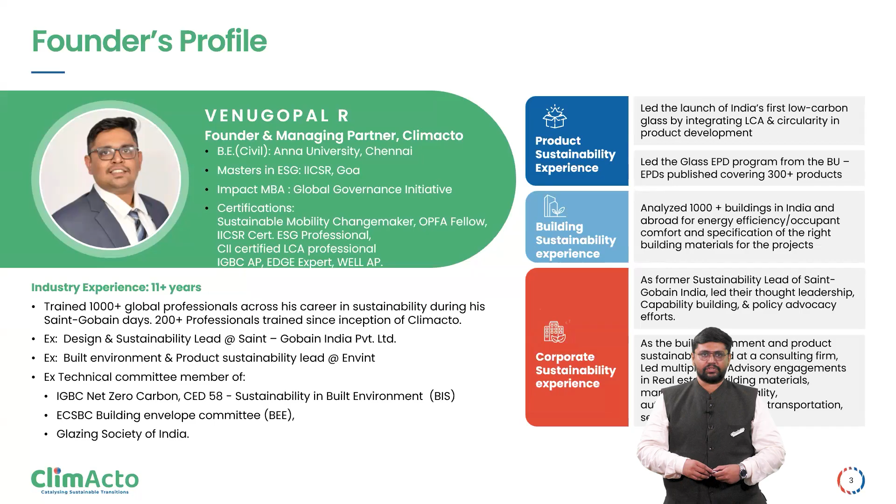We are 7 months young, and before that I was a sustainability lead at Saint-Gobain, right? So that's a bit about me. More than 11 years of experience in sustainability, and I've worked across product building and corporate sustainability. I've also done some policy work at BIS and BEE through industry bodies like CII and Glazing Society of India, etc. And I was responsible for launching India's first low carbon glass, which has 54% lesser global warming potential than any other glass products, during my time at Saint-Gobain, of course.

Cool. So, today's plan, we already started with a quick introduction. I will try to cover the life cycle assessment from a building's perspective. I'll just brush up on the basics in that case, because many of you were not willing to raise your hands. So I'll quickly brush up on the basics of embodied carbon of a building. And I'll also cover some of the trends that we observe in the industry when it comes to life cycle assessment intersecting with embodied carbon and ESG, right? So that's something we will do, and then we can have a quick short discussion on any queries. So this is going to be the flow.

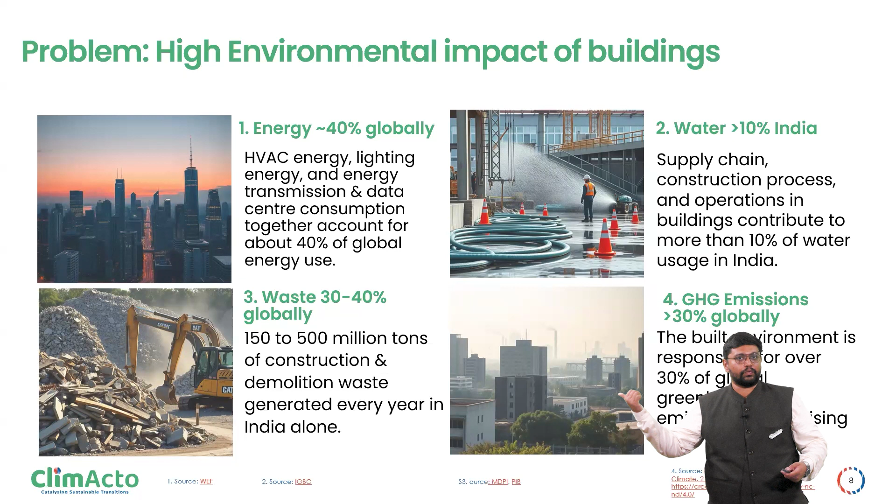The range is between 0.5 kg to a kg of waste per capita, right, per household. That's how much waste we generate every day. And that accounts for almost 30 to 40% of the global waste that is being generated. And of course, the fourth point is the GHG emissions from this one industry is 30 to 40%. Right? So this is the impact that this one particular sector is creating.

So then what do we do? Do we not build at all? No more development? Is that the line of thought? Should the answer be degrowth? That's debatable. We can't take very strong positions on this, but what we need to do is balance, right? We need to grow and at the same time find a way to grow responsibly. That's what we need to start thinking about.

And as a developing country, we have a vision for ourselves. By 2047, we need to become a developed country, a Viksit Bharat. So to become a developed country, we can't stop making roads and stop making buildings. But what we can do is make them responsible and make them more sustainable.

So the green building movement in India for the last 2.5 decades has been very active, and I've been in that movement for almost 1.5 decades. And what we see is sustainable construction is possible, and it is a possible solution for the problem we have in hand. So the storyline till now is buildings are part of the problem, but I can show you how they can also be part of the solution, right?

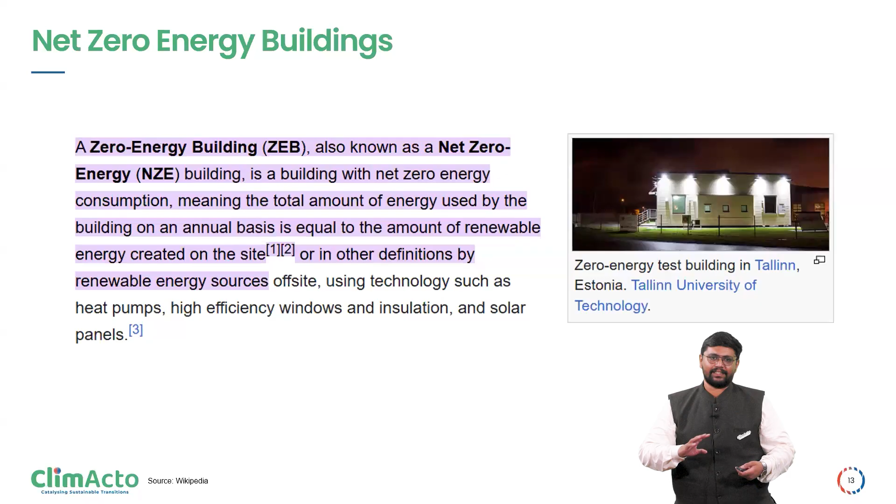So it's still not zero. For the remaining 20 kilowatt hours, you shift towards greener power, right? And then you do the math, it comes close to zero. If someone claims that their building is an absolute zero building, then you'll have to raise your eyebrows. It might not be true. All that you could do is achieve net zero, where you do the math and it comes close to zero, right?

So even in a net zero building, there are going to be some residual emissions. There is a carbon footprint in spite of it being a net zero energy building. And that is mostly the carbon emission that goes unaccounted, which is the embodied carbon emission. So now I introduce this new jargon to all of you. Embodied carbon is nothing but the carbon footprint that goes into making the building: the cement, the steel, the aluminum. All these raw materials get manufactured. Most of these materials are hard to abate, right?

So cement, when you manufacture 1 kg of cement, can anyone tell me what is the carbon footprint? Yes, 0.8, and that can range from 0.8 to 1 kg, depending on the type of raw materials used, and it can be brought down to as low as 0.4, 0.5 if you add some other materials instead of limestone. So cement is that. Steel, any guess how much is the carbon footprint of 1 kg of steel? 2.5 kgs. If you have to get 1 kg of steel, you are going to emit 2.5 kgs.

That's the Indian average. In steel you have primary steel and secondary steel. Primary steel is from the ore: you do mining, then you melt it at a higher temperature, add other processes, and that's the primary steel. There's secondary steel, which is made mostly out of scrap. That secondary steel can go as low as 0.6 kgs per kg. There are Indian manufacturers who make steel of the same functional properties at 0.6 kg and also at 2.5 kgs, right?

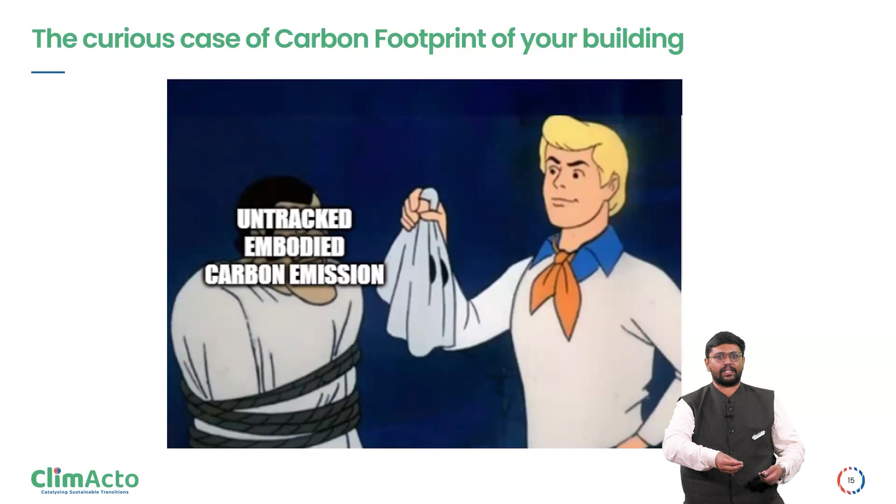So like that, for each process there is an emission, and the process emissions of your products and raw materials that go into the building are your embodied carbon. And it also has multiple other aspects. Even after your building is demolished, the processing of that waste will also be accounted in the embodied carbon. So basically, to simplify this, thinking about the life cycle of the building will give you these 4 broad stages.

First is the product stage. You have the cement, steel, aluminum, glass, bricks, all of these materials manufactured at different locations. Then you have the construction stage. All these materials come to the site, and construction of the building happens, starting from the foundation till the superstructure, etc. Then the use stage.

The life of the building can range anywhere between 30 to 60 years, depending on the design codes. And then the end of life of the building. After its serviceable years, either it is left abandoned or it is demolished and a new building is constructed. Okay, so these are the four stages of the building.

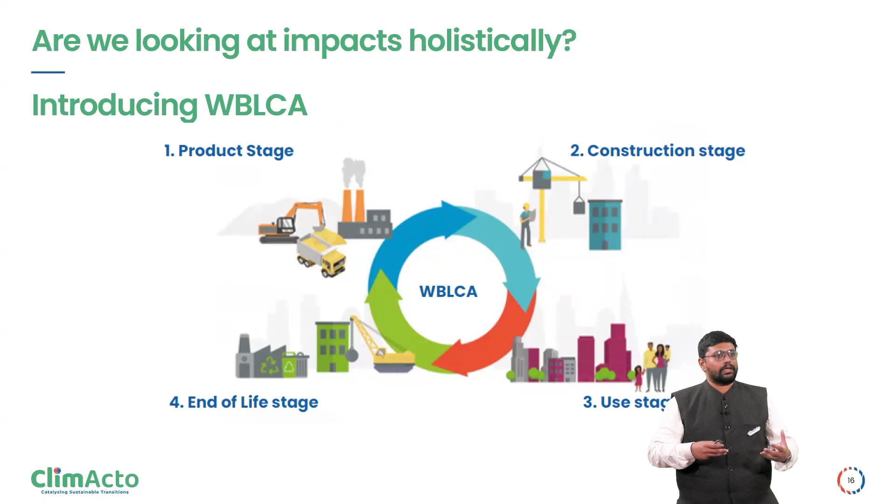So the second new jargon I am introducing is WBLCA, whole building life cycle assessment. Whole building life cycle assessment is you consider the entire life cycle of a building, and you understand its emissions right from the raw material till the end of life, and sometimes beyond end of life of the building, which includes your reuse and also repair, etc.

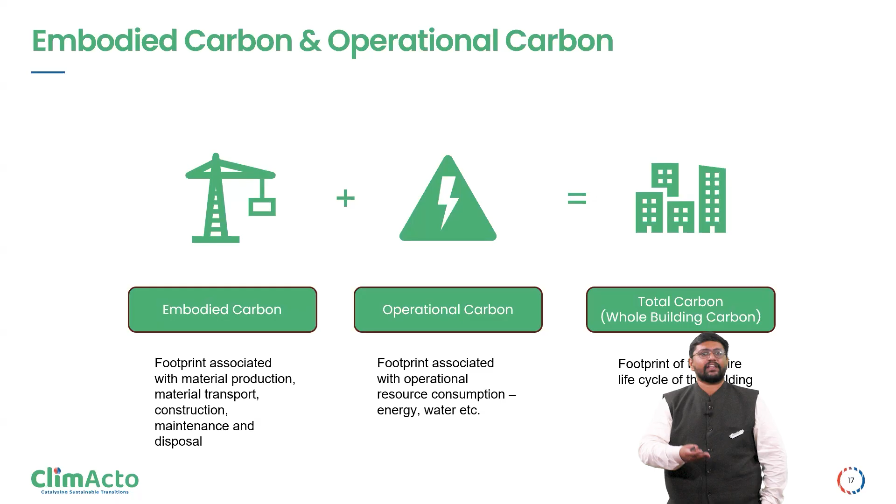Okay, so broadly we could try to simplify that circular diagram into this. There's embodied carbon and then there's operational carbon, which put together gives the whole building carbon, right? And as you all might already know, there are multiple impact categories. Global warming potential is only one of them. Today for buildings, we are talking only the global warming potential, which is the carbon footprint. But ideally, we should look at multiple impact categories like acid rain potential, ozone depletion potential. But today's focus is going to be on embodied carbon and operational carbon, which is the GWP, right?

Any guesses why this shift is happening? Why is 76-24 becoming 51-49? The material usage. Yes, the material usage is going to increase, yes. But why did 76 become 51? The type of material. Maybe we will be adding renewable energy. Renewable energy, energy efficiency, passive and active strategies to reduce the energy.

So the technology, once you build the building, you can upgrade the HVAC, you can shift the energy to cleaner sources, etc. But you cannot change what cement was used, what steel was used. It's going to be there till the life of the building. So if we don't take decisions at the drawing board today, the buildings of 2050, 2060 are going to stack up like that, right? So that's why the awareness creation needs to happen today.

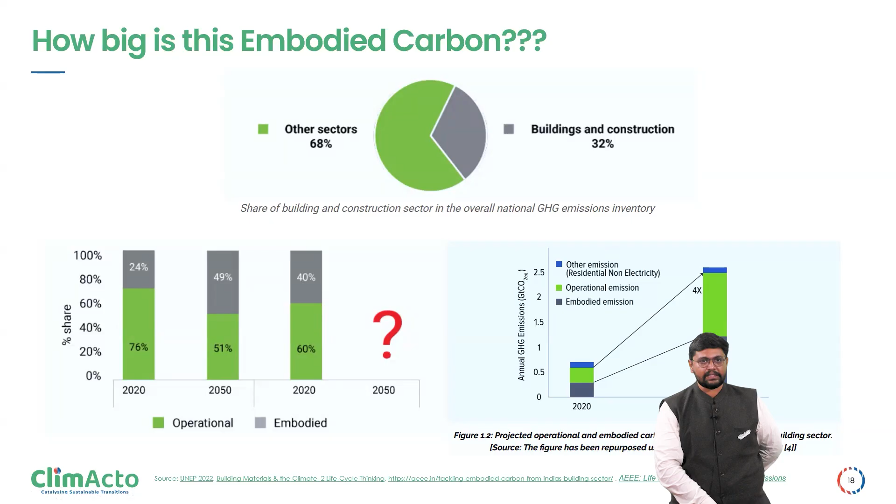So this estimate says 60-40 is the number in India. This study was done by AEEE and they are saying 60-40 is the number today in India and we have no clue how much it is going to be in 2050. And the estimates are saying it's going to be 4x. So in 2020, whatever number was there, it's going to become 4x by 2070, and that's when we plan to be net zero as a country. So this is the problem we have in hand.

Let's look at how do we manage this. To manage anything, we need to start measuring it. What gets measured gets managed is a very famous management quote and I'm applying it here for embodied carbon as well. And what are the existing frameworks? In India, we don't have our own framework for doing this, but there are global standards and guidelines available.

15978, the European nations have this standard which says how to report the carbon footprint of a building across its life cycle. So like how you have a standard for concrete, for steel, for manufacturing, this is only for calculating and reporting the life cycle impact of a building. And if you look at it from a product lens, it's 15804, the environmental product declaration. The environmental product declaration in simple words is a mark sheet of your product from an impact point of view.

So usually for us, we need to get more marks to be a good student, but in this case it should get less marks to be a good product. So lesser the impact, better the product, right?

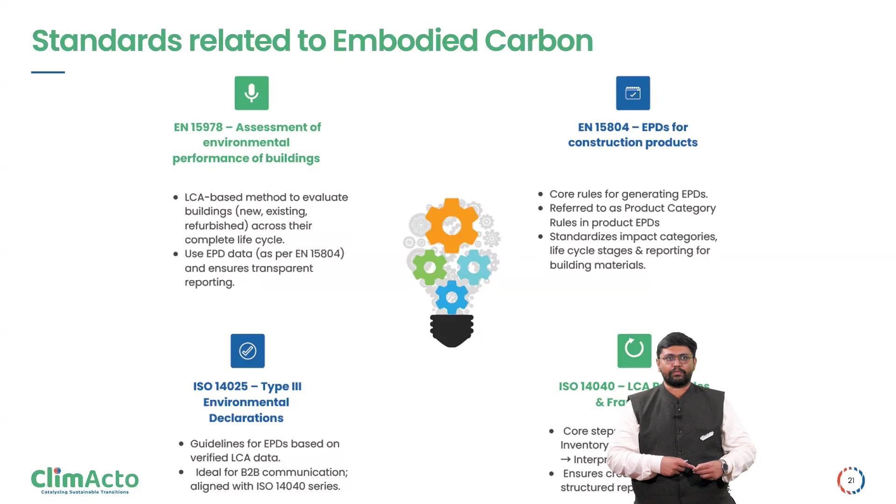So the environmental product declaration, we have 15804. Then we have the EPD standard, which is 14025, and they give you the standard way to report an EPD and publish an EPD. And 14040 is the LCA principles. So we already have these frameworks in place which can guide us with the measurement.

Okay, and I'm bringing you some new nomenclature as per 15978, which calls the product stage as A1 to A3. So this is basically whatever you have as the life cycle stages. They have given some standard ways of labeling them so that you have an apple to apple comparison between two buildings, right? So if I say that building A has 500 kgs per square meter carbon footprint, building B has only 250 kgs per square meter carbon footprint, the first question you should ask is what is the boundary?

Are you only talking about the product stage, or are you talking about the entire life cycle, right? So these are some questions that you need to ask. So to reduce all those conversations, they have standardized all these formats.

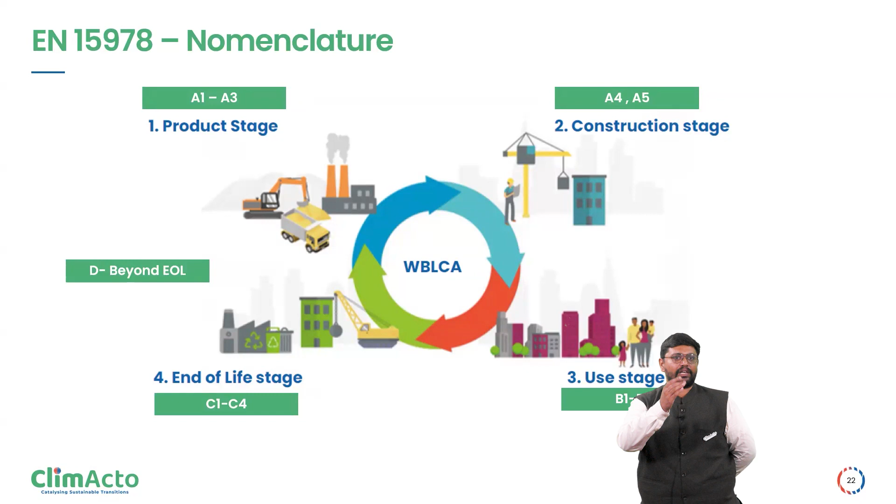So A1 to A3 is product stage, A4 and A5 is construction stage, B1 to B7 is use stage, end of life stage is C1 to C4, and beyond end of life, EOL is end of life, beyond end of life is D. So A, B, C, D: product and construction are in A, use is in B, end of life is in C, and beyond end of life is in D. So this is the standard nomenclature that they follow.

And just to put it up in one slide, this is how it looks. So A1 is nothing but the raw material supply. Let's take for example cement. The cement raw materials include your limestone, and that's the basic raw material that you need, right? So where is the limestone coming from? That's the first question. The energy spent in mining that, the energy spent in processing that, all that will be in A1. A2 is transporting the raw material to the manufacturer site, right?

So if you are transporting that limestone from say Tada to Chennai, that has a 120 kilometer commute, right? So if you are commuting through diesel, if you are bringing it through EVs or petrol or CNG, all that will affect your A2. A3 is your manufacturing. So you are manufacturing cement. For that you will expend energy. So that will be accounted in A3.

So A1 to A3 is your cradle to gate. So these are the standard boundary conditions defined in 14040. The cradle to gate emissions is A1 to A3, which is nothing but the cement manufactured, the carbon footprint which we discussed, 0.8 kgs, 1 kgs, all that is cradle to gate, right? Then A4 is you get cement, you transport that manufactured good to the site, right? So that is A4, and A5 is construction related emission.

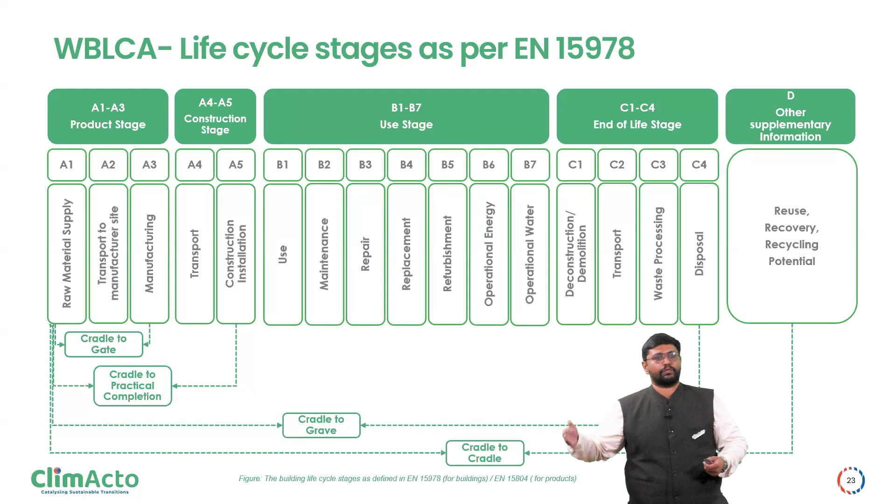And anything beyond this that is not captured here will go into D, right? So this is broadly the life cycle of a building labeled as per 15978. You open any environmental product declaration of steel, glass, any building material, it will follow this, because the product category rule for an EPD for building material is usually following 15804. 15804 is an EN standard which was developed based upon 15978. Right? So the names and the labeling will be very similar. So everything in the built environment will speak the same language, right?

So clearly, if you are focusing on the product stage and during the construction stage, we have access to almost 60% of the embodied carbon. You have control over 60% of embodied carbon across its life. The remaining 38 to 40%, there's only so much that can be done. For instance, I'll take the example of paint, right? Paint is something that will be repainted after a few years because it will lose its properties, right? It won't look as good. The paint done today might not look as good after 5 or 6 years. So in that case, what happens? We do a repainting. We will account that in the use phase.

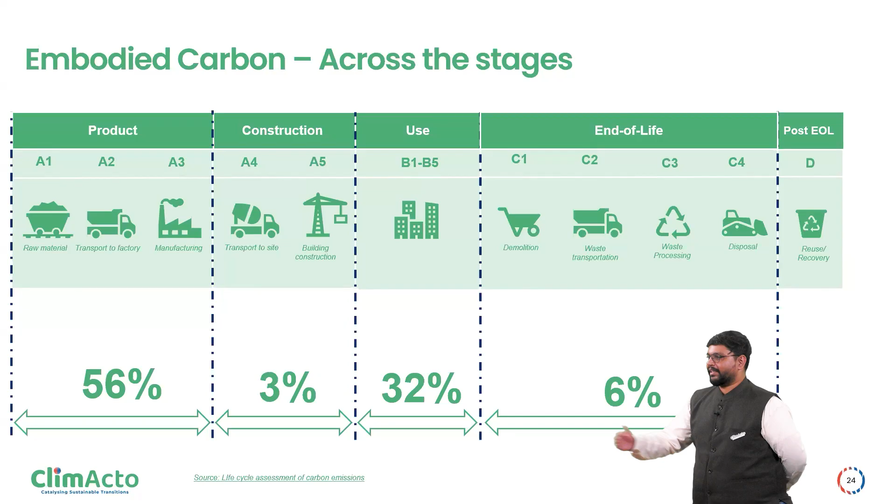You can't use it directly because in India everybody speaks A1 to A3. Beyond the gate nobody has control of what happens to that product. So that is the scenario. Even in many global products you will see this. Only A1 to A3 data will be available. Very rarely you will find cradle to grave data. Okay, fine.

So some quick math. There are two things that you need to understand. As I already explained, the material quantity is important. What is the material quantity used in the building, and what is the GWP per that material quantity. In both the cases there are challenges of data. First, material quantity: something will be there in the bill of quantities, something will be there in the site. So that is one challenge. Second, the GWP: mostly the numbers available are European numbers. Indian product manufacturers having their own EPDs and LCAs done are fewer. So these are the two challenges in this slide.

So that is a material footprint, right? That is quite easy and straightforward to calculate. 100 kgs of cement, 1 kg of carbon per kg of cement. So 100 into 1 is 100 kg of carbon footprint for that one line item. Do the same exercise for steel, aluminium, glass, concrete. You will find the carbon footprint for the entire BOQ. That is A1 to A3.

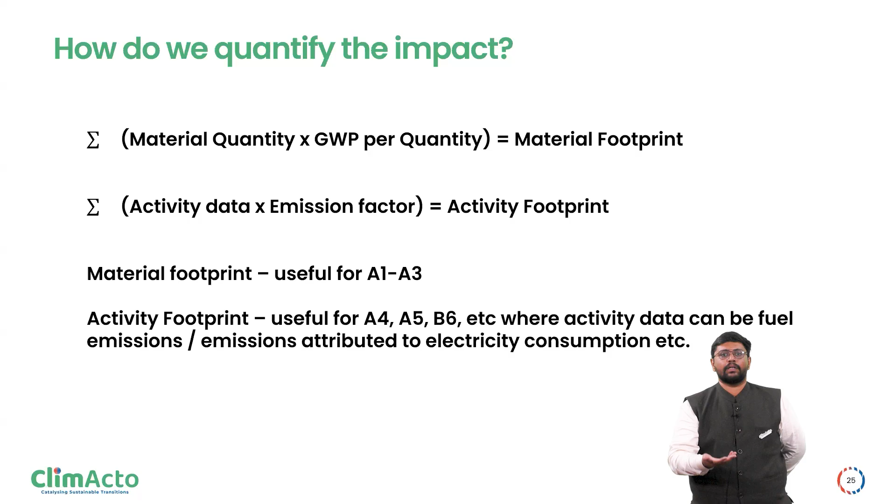Activities like A4, transporting product from the manufacturing site to your project site, will need activity data. How many kilometers traveled, what is the type of vehicle used, what is the type of fuel used, all that will be required for calculating numbers like A4, A5, B6, etc., which are activity data, right?

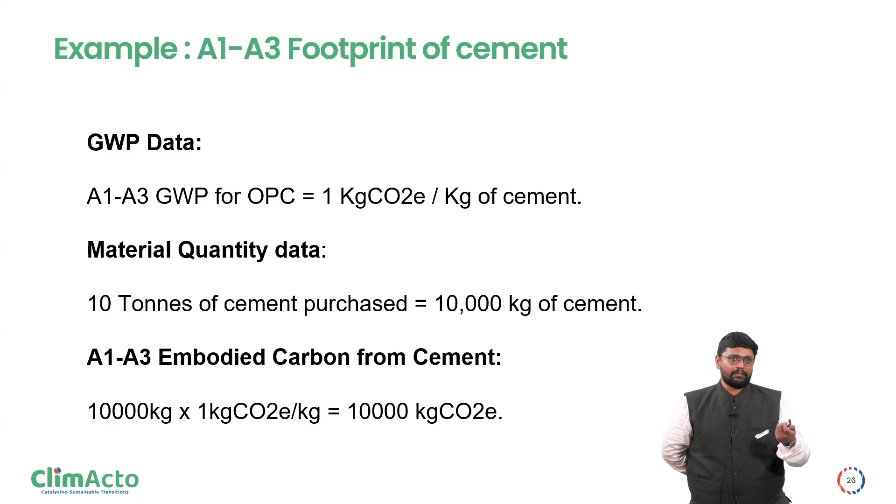So just giving some example, A1 to A3: I am taking 1 kg for OPC, ordinary Portland cement. 10 tons of cement used, which means 10,000 kgs of cement, into 1 kg carbon dioxide equivalent per kg of cement is 10,000 kg CO2. This is for this one line item.

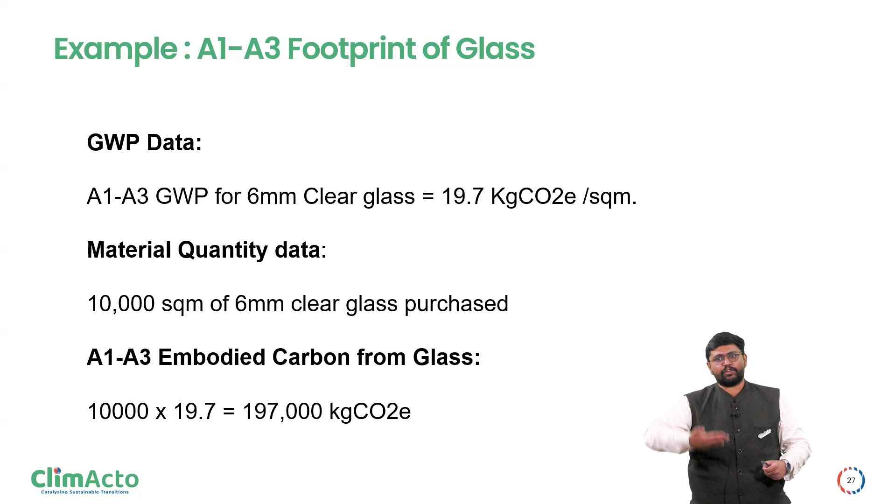Same for clear glass, a regular clear glass 6 mm. You can notice that when it comes to glass, the thickness aspect also comes in: 6 mm glass, 8 mm glass, 10 mm glass, and then how much area, is it 10,000 square meter, 8,000 square meter. That's where the aspect of functional unit is very important. When you read the environmental product declaration, you need to note down what is the functional unit. It can be kg, ton, square meter. If it is a paint, it can be square meter painted, right? So all these are some examples. It's a very straightforward calculation.

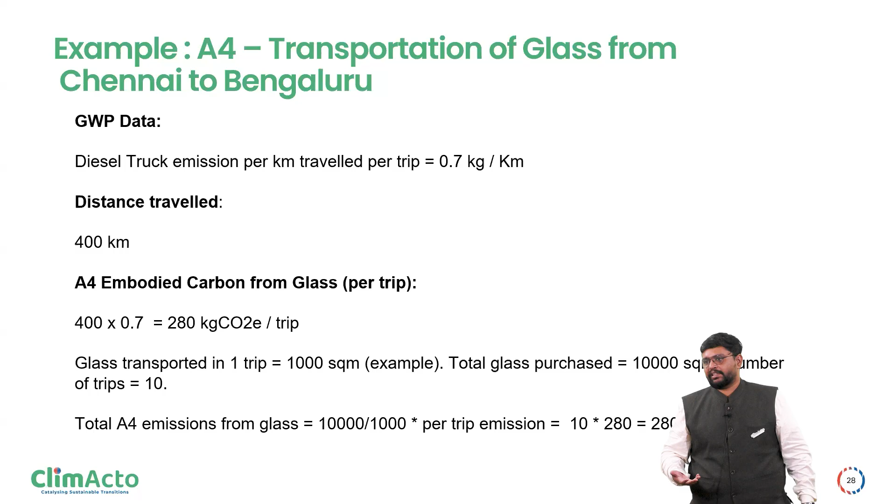Distance traveled can also have an impact, and also the capacity of the vehicle, right? If the capacity of vehicle is only 20 tons and your requirement is say 100 tons, then you need 5 trucks. A higher capacity vehicle might emit slightly more than the regular vehicle, but maybe the number of trips will be lesser. So you need to calculate the number of trips, quantity. It's a very straightforward calculation. The challenge is data availability, right?

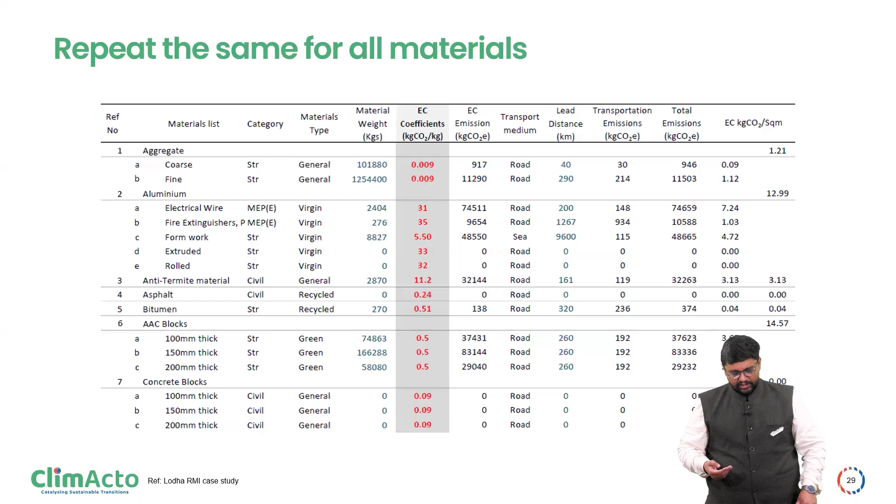Then you can notice the next column, the transport medium, whether it is road or by sea, etc., as mentioned over there. And then the distance traveled by that material. And then for each type of travel mode of transport, you need to have a representative embodied carbon for that. For that, you will need to either refer to some sources which include the International Maritime Organization, the IMOs have their own databases, right? Or if it is going to be by flight, there are some CORSIA databases available.

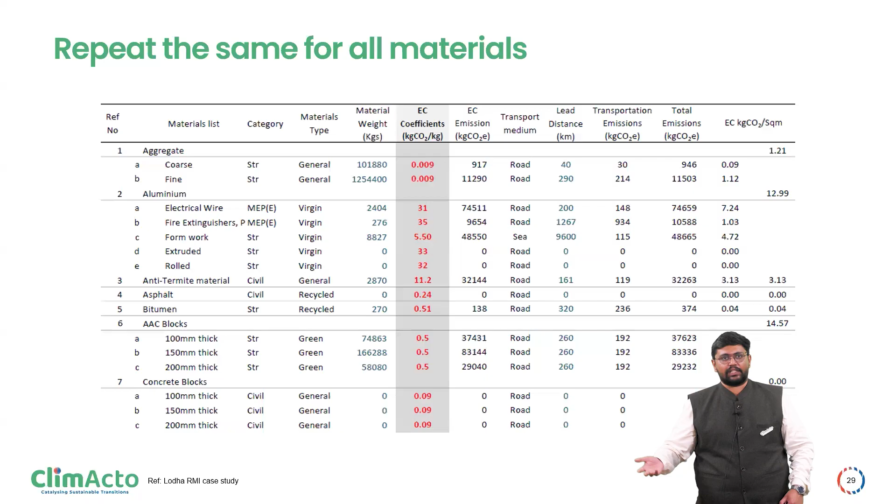Mostly the IPCC database will also give you these numbers for the transportation, but if you need more data, you can find other databases and mention them in your calculations, right? So the transportation related detail is like how you do a GHG accounting. It's very similar, but the material level data you need to get it from EPDs.

Okay, but where can I find this carbon footprint of these building materials? I think I slightly gave away that answer. It's from the environmental product declarations; that's the most reliable source of information. In the absence of that, you get some industry reports. Like for instance, for cement, there is something called the GCCA, right? So the GCCA is the Global Cement and Concrete Association. They release industry reports where you could get these numbers.

Like OPC is 1 kg, PSC, which is Portland slag cement, that is so much kgs, and slag cement is so much kgs. So all those details you can get from industry reports as well. There are research papers available. There are institutes like RMI who also release some papers, methodologies, etc. Right? There's something called the CLF, the Carbon Leadership Forum. So Carbon Leadership Forum is another source for a lot of case studies on embodied carbon.

Okay, this is how a typical EPD will look like. I'm going to show you the anatomy of an EPD. If you open an EPD, you will have the brand name, the product name, then all these details about the product in the first page. You will also find the validity and the geographical scope. It's very site specific, because the same glass or cement made in India, if it is going to be made in another geographical location like Europe or UK, it might have different energy coefficients, different sources of energy, distance of transportation. EPDs are always site specific.

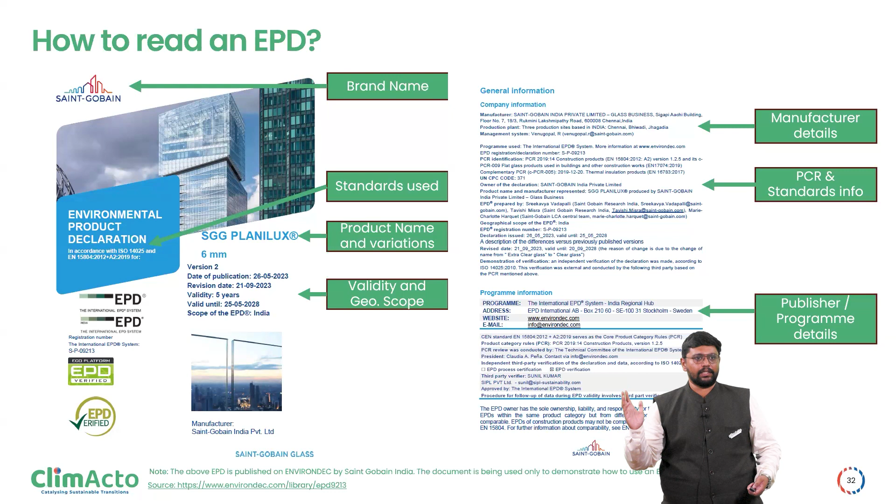So all these EPDs will be hosted in one publisher's website, like Environdec, EPD Hub, EPD Norge, etc. So these guys host EPDs and publish EPDs on their website. These are openly available. You can go and download them. Okay, then you will find the functional unit. In this case, it's 1 square meter of glazing. Then you will find the system boundaries like A1 to A3, cradle to gate, etc.

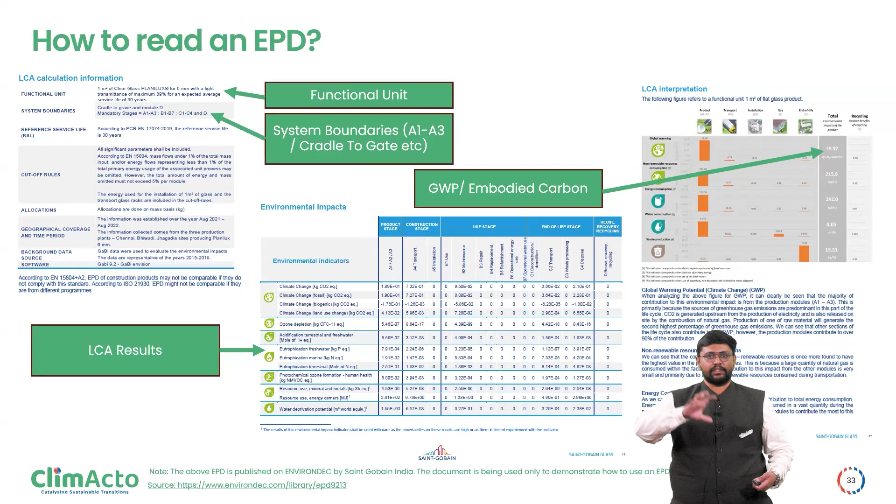Then you will have the LCA results for that functional unit, for the mentioned system boundary. So the GWP or embodied carbon, you will find it as how many kgs either in the climate change section or in the GWP section.

So some questions that you can ask, because every stage matters. In the product stage, how can I reduce the material consumption is a great question. Are there alternative technologies which can reduce consumption of concrete, mainly cement and steel? If we can adopt that, yes, that can reduce the embodied carbon. Second, if you could not optimize the material consumption, because I'm just playing with that equation, material quantity multiplied by the embodied carbon is the total emission of that particular line item.

So the first lever I am pulling is the material consumption. The second lever I can pull is the product. Does it have a lower carbon footprint? Is there an alternative with a lower carbon footprint? So that is the second lever I can pull. And always when you buy products along with your BOQs, this is something I want to bring in.

If you are asking for a product, ask its footprint, right? It's going to take time, but we need to start moving towards the direction. Then the construction stage, can we procure locally available materials, because A4 is getting reduced, right? Then can we opt for lower emission transportation? If the distance cannot be reduced, can we shift the fuel from diesel to CNG, right? So that is the question. That's another lever to pull.

Then can we use efficient and eco-friendly construction techniques? When I say eco-friendly, can the construction happen in a way that it consumes less energy, less water, less fuel, etc. So all that is the A4 and A5 emission. Then comes the B1 to B7.

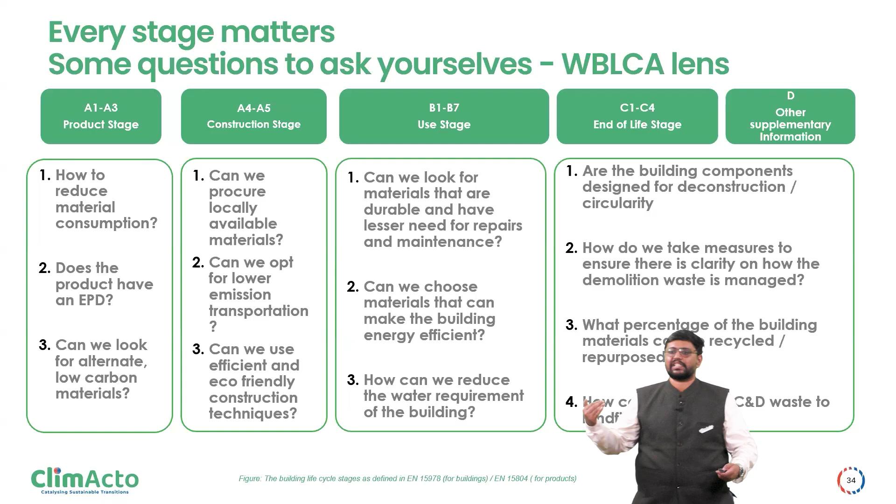How do we take measures to ensure that there is clarity on how the demolition waste is managed? This is a big topic. There are a lot of regulations that are coming around this. What percentage of the building materials can be recycled or repurposed? How can we reduce the C&D? So these are broadly some questions people can ask at the early stage, right? If we find the answer for these questions, I'm sure that embodied carbon reduction is also possible. So this is something I wanted to discuss.

Okay. Quickly, let me take you through some trends that I observe. LCA is finally getting its way into green building certifications. For a long time, the green building movement in India was talking more about energy efficiency, water efficiency, because they were the problems that we were having. Now you can see LCA getting its place in green building certifications like IGBC, GRIHA, LEED v5. LEED has a recent one, LEED v5.

LCA also has its place in ESG frameworks like BRSR. BRSR is the Indian ESG framework called Business Responsibility and Sustainability Reporting. This is mandated for the top 1,000 listed companies in India, right? So when they disclose their financial information, these listed companies also disclose their ESG performance as a report, and in that some criteria are linked to LCA.

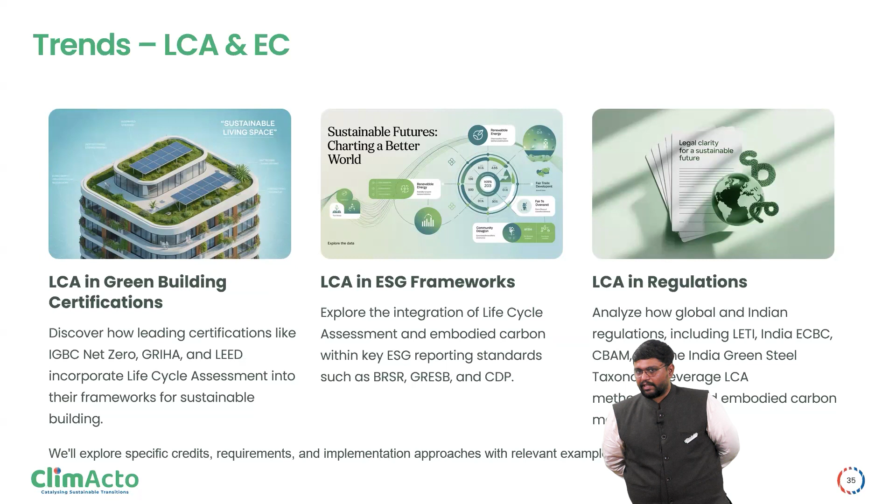Then LCA is getting into regulations. This I've seen in the UK, I've also seen in Europe. I will share some examples, but there are going to be some regulations around life cycle assessment. So let's quickly see. One of them is the ECSBC. How many of you know what ECSBC is? I'll go back.

Okay, one of you. It was earlier ECBC. Yes, perfect. So it was the Energy Conservation Building Code, which was an Indian guideline from 2007 till 2024. It was a guideline, and 2024 onwards we have it as the ECSBC. And as per the revised Energy Conservation Act in India, buildings beyond a certain threshold should follow this. It's no more a guideline, right?

So it's been getting mandated in phases, and in that you can find a chapter on sustainable materials which speaks the language that we just spoke, right? So EN 15978 is referred. kgCO2 equivalent per square meter needs to be reported, right? So that's one of the things that is there in ECSBC.

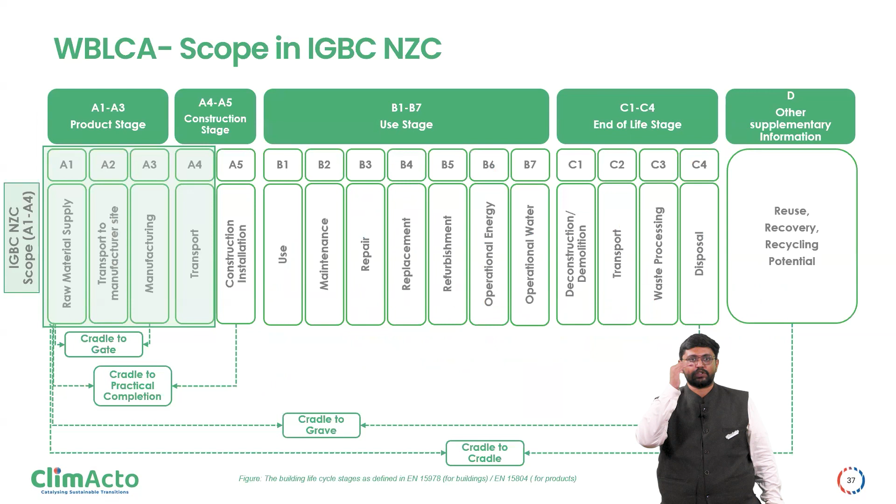Slowly there will also be some thresholds that will be released, right? So first it starts with measurement, and slowly you will also see some thresholds saying it needs to be limited to say 500 kg, 600 kg per square meter. Things will be rolling out soon on all these topics.

Okay, and then in green building rating systems, there's this IGBC's pilot rating system on net zero carbon buildings. IGBC has some 32 different rating systems; 4 of them are net zero ratings: net zero energy, net zero water, net zero waste. The fourth one is net zero carbon. I was there in the technical committee while formulating this.

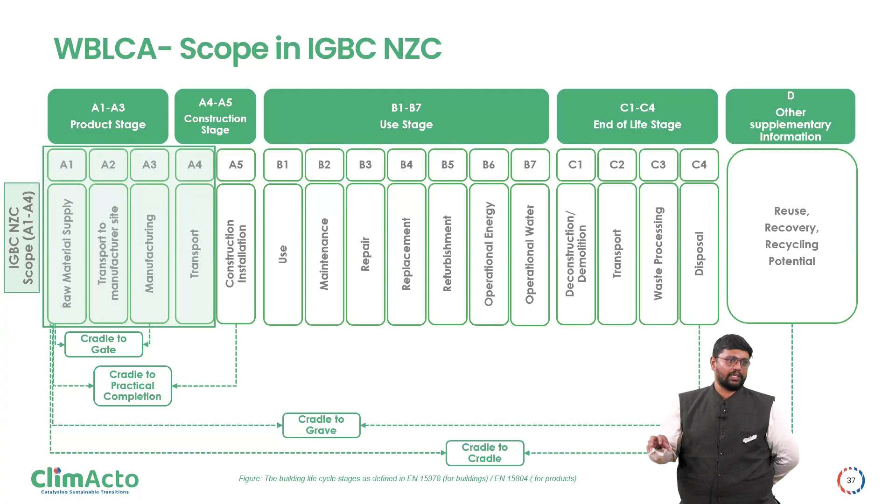They have set a threshold of 700 kg per square meter of built area, which is including A1 to A4, so which is the product and the transportation. So you need to buy a good product and buy it locally to make the carbon footprint lesser. It has to go below 700 kg per square meter, and based on how much percentage you reduce, you get points, right? So that's how this rating was designed, and A1 to A4 is a boundary condition for IGBC net zero carbon rating.

So this is just some screenshot from the rating system. It's still in pilot mode, and they have two levels: net zero carbon and near net zero carbon. If you score 40 points, you get near net zero carbon. If you get 60 points, you get net zero carbon. And they have criteria on how to achieve each of this.

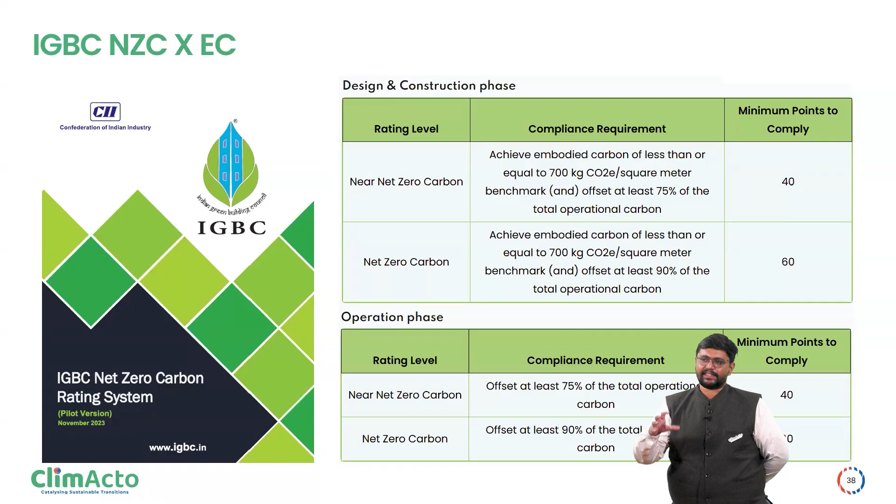And also in the new construction rating system itself, there are some revisions coming in. I have seen the draft. All I can comment is embodied carbon is also getting its place in it. It was launched in the Green Building Congress recently. Everyone will have to start measuring and declaring it, right? And that is given as a credit. So if you go through the new rating system, you'll understand that this has got its place as well, right? I don't want to comment further because I'm not sure if the final one is published or not. I was there in the committee, so yeah.

Coming to this, this is from LEED V5, the recent one. LEED is from USGBC. So I'm using all 4-letter abbreviations. These are all different rating systems. IGBC is the Indian Green Building Council. ECSBC is the Energy Conservation and Sustainability Building Code from the Bureau of Energy Efficiency in India. Then for whole building life cycle assessment, there is a credit and there is a prerequisite in LEED. LEED is from the US Green Building Council, because I also noticed that there are international delegates here.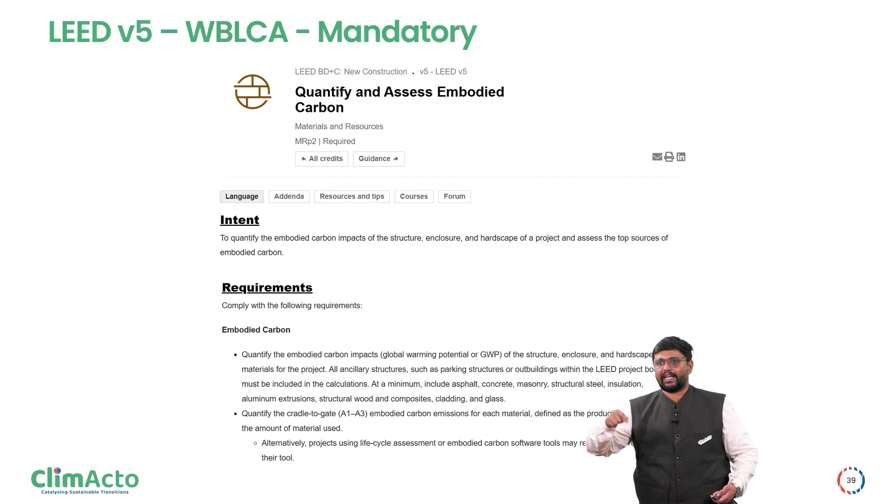So LEED is a global rating system, and there even A1 to A3 is mandated. You can't get a platinum rated building by using bad materials, right? So you need to calculate the carbon footprint from A1 to A3, and for credits you need to do other impact categories as well. There are some 6 impact categories defined in the credit, and if you reduce 20% compared to the baseline, you get some additional points. So that's how the credits are restructured now in the building material section of green buildings.

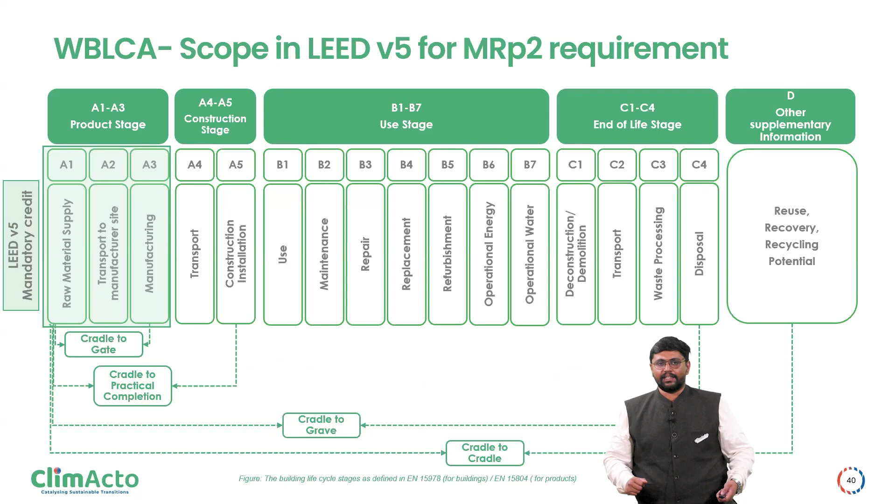So I'm just showing you what's happening in all these areas. I'm not telling you that this is exactly what you need to do to reduce it, because this is an ever evolving topic, right? So you can see here, the mandatory requirement is MRP2. You can find it, A1 to A3 is the coverage. So now you can go and see in different rating systems, if they are saying A1 to A3, it means cradle to gate, just for your understanding, right? So this is the thing I said.

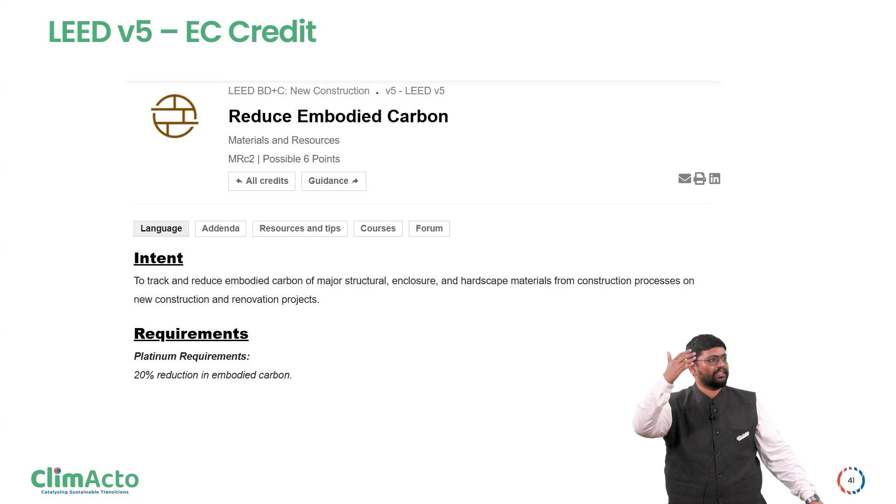If you reduce it by 20%, if you observe the last line: LEED platinum is the highest rating in that system. If you want to achieve LEED platinum, you should show that you have reduced at least 20% of the carbon footprint impact compared to a regular building, right? Without that, you can't get it.

Okay, GRIHA is another Indian rating system. The latest one is GRIHA V6. I'm still showing you GRIHA v2019 because I'm not sure if V6 is finally out there or not. But in V19, there were 3 criteria.

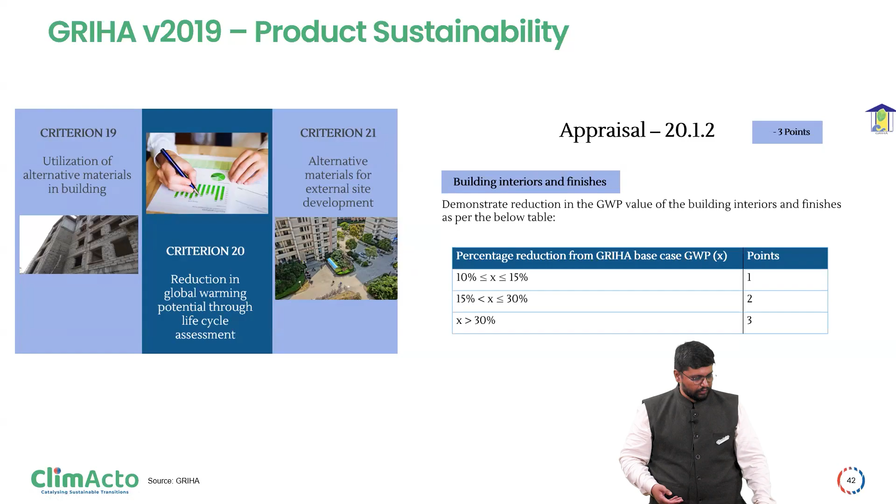I checked the V6 document, these 3 criteria are still there. What they are saying is how you will use sustainable materials, sustainable building materials to reduce the embodied carbon. How they are incentivizing us: if you have a 10 to 15% reduction, you get 1 point. If you get a 15 to 30% reduction, you get 2 points. If you reduce more than 30%, you get 3 points.

So all this is defined in the Griha rating system. You will also find it in the V6 rating that was recently launched. I think it was a month back. Yeah, so this is the scope in Griha. You notice that in IGBC it was A1 to A4, which included the transportation. In LEED it was A1 to A3 for the mandatory requirement. And then in Griha it is A1 to A4 plus B4.

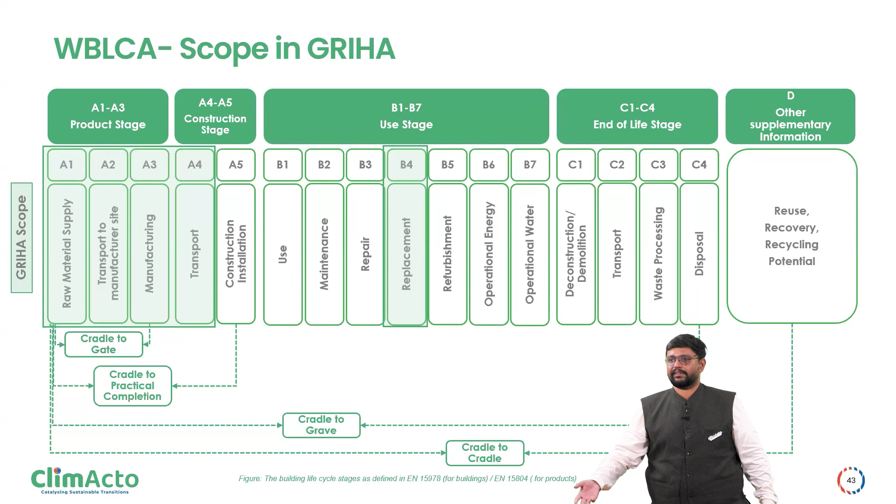Reason is, the paint example I took. If you are going to replace it, then you are going to account for it, right? So this is giving credit for a durable material. If the material is durable, then the replacement emission will not come in its lifetime, right? So that is something that is different in Griha.

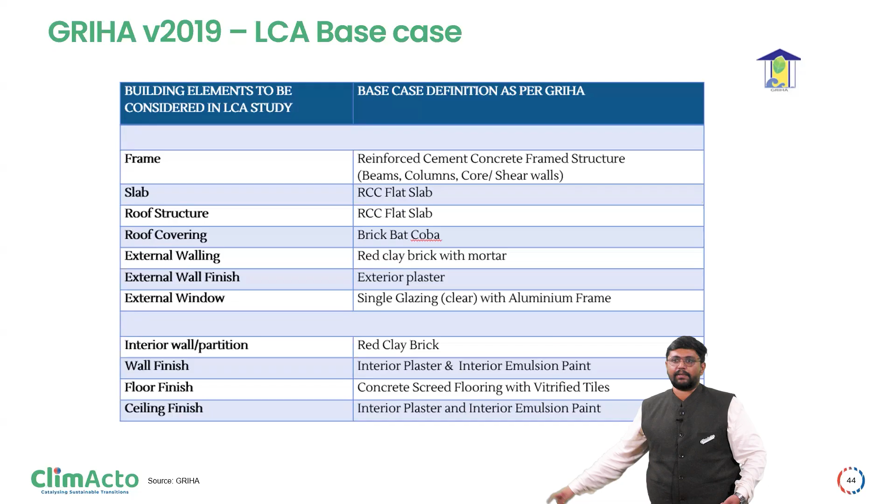Yeah, now the question will be compared to what they will reduce by 10%. So they have also defined some base materials, right? So this is how the base case building will have to be built. Compared to the base case, you have to show improvement of so much percentage, right? So all this definition is there in the Griha standard.

Okay, there is another rating system called EDGE. EDGE is Excellence in Design for Greater Efficiencies. The EDGE is coming from the International Finance Corporation. It's another international rating system, not India specific. And they have tried to simplify and make the rating system work on number basis. When I say number basis, they already have the database of the baseline energy, water, embodied carbon numbers. Compared to that, if you show that your building is 20% energy efficient, 20% water efficient and 20% lesser embodied carbon, you get certified. So they have simplified the entire rating system and you can see dashboards on their tool.

This is an openly available software where people can go and model a few things. Say that my home is a 2000 square foot building. Compared to the base case, if I replace few things, instead of a clear glass, I use a better glass. Instead of a regular cement, I use a different cement. All these initiatives, you just check the tick box and you enter some basic information. It will tell you how much percentage lesser are you compared to the base case. So this is something I would recommend all of you to go and check. And embodied carbon is one of the 3 pillars of what they are measuring to give the certification.

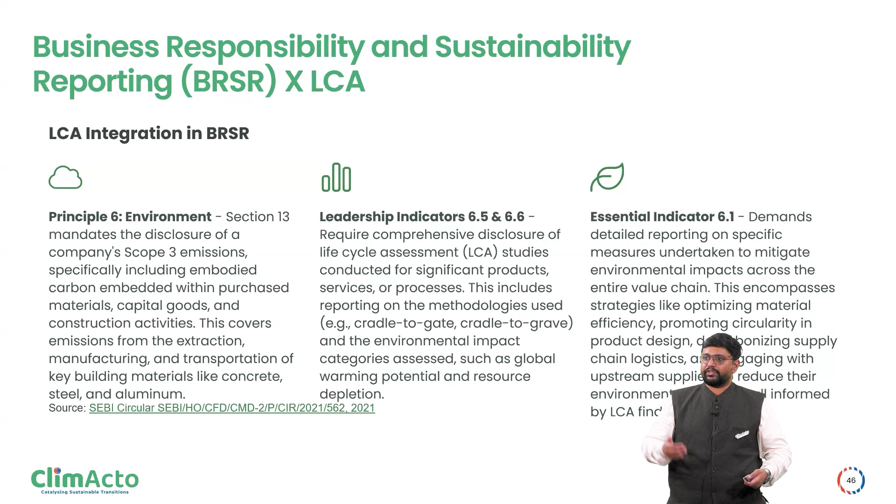Then this is about the ESG, LCA integrated in BRSR, the business responsibility and sustainability reporting. Principle 6 is for the environmental impact, and in principle 6 you will find mention of how are you understanding the life cycle impact of your product, right? So that needs to be declared in the BRSR report of these companies. So this is a good trend to observe that SEBI launched it 2 years back. SEBI is the regulator for all these stock exchanges. So they mentioned that top 1000 companies should declare all of this, and we have got 2 years of reports already available, published, for all these 1000 companies.

Okay, so there is another ESG rating called GRESB. GRESB is Global Real Estate Sustainability Benchmark. There also they are speaking about how you can reduce the embodied carbon of the building. What measures are developers taking to reduce the embodied carbon of the building? For that also there are some point allocations. So you could look up GRESB and what it is.

To simplify, it is a benchmarking. They will give you a benchmark number. Say for example, developer A is at 100 points, developer B is at 85 points. An investor who wants to put their money in that real estate company will understand, compared to developer A, which developer is better based on the score that they get.

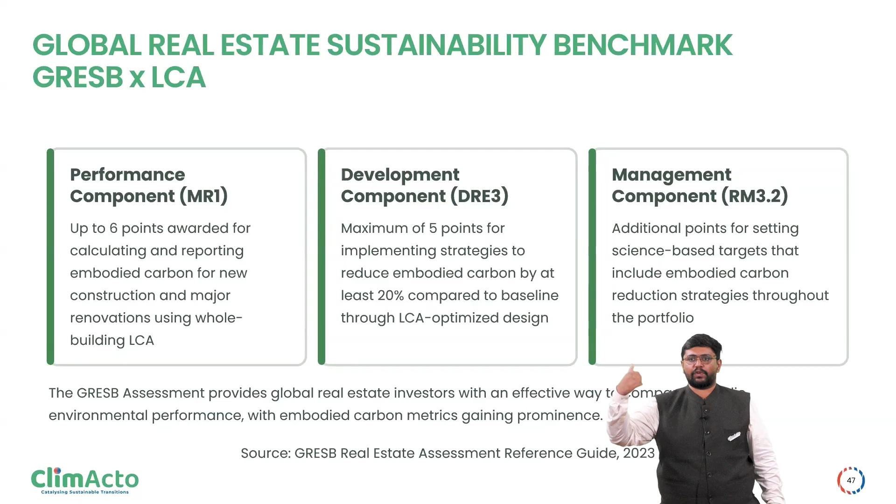So they have got a framework to give points if you have good policies, green buildings in your portfolio, and then embodied carbon measures, then your occupant comfort. Like how for a building you have these green building rating systems, GRESB is for the entire portfolio or for the company. So this is a corporate sustainability rating system, and you get a score, and in that also you have few areas where LCA and embodied carbon is getting its place.

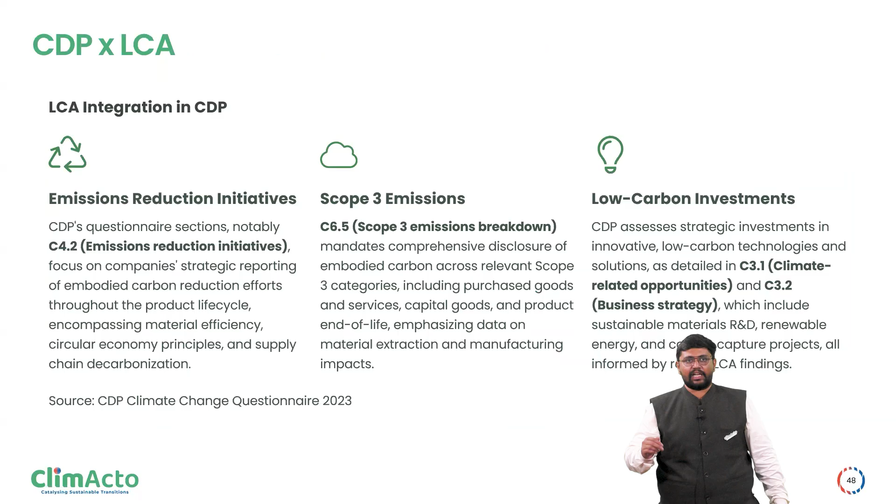Right. Yeah, so CDP is Carbon Disclosure Project. So they also give some ratings like A+, B- for companies. This is again at the company level. There also you can find life cycle assessment getting its place and mention, directly or indirectly, as either a scope 3 emission or emission reduction initiatives or low carbon investments. Especially for real estate companies, the low carbon investment will be embodied carbon reduction mostly, right?

Okay, now some more trends that we observe in EU. There are some regulations that are coming in place, like for instance the ESPR, which is the Eco Design and Sustainable Product Regulation. So there you can see it's not only for construction, for multiple product categories they are developing product sustainability regulations. So this can be a trend that can also happen in the Asian countries and other developing countries.

And yeah, there is a small video, but I'm not sure if we have time. In the absence of time, I will send across the video. It explains what is ESPR and what products are covered, etc. So I will share that with the faculty, they will share it with you, right? But do look up ESPR. So it's a 1-minute video.

Okay, so then there is something called the DPP, which is the digital product passport. Like how we all have a passport when we travel to a different country. Imagine a product having a passport which says where was it made, how was it manufactured, what was the environmental impact of that product. This has already got an implication in the textile industry. So DPPs are going to be implemented soon in Europe, and if you are exporting to Europe from your country, this is something that you need to look up to.

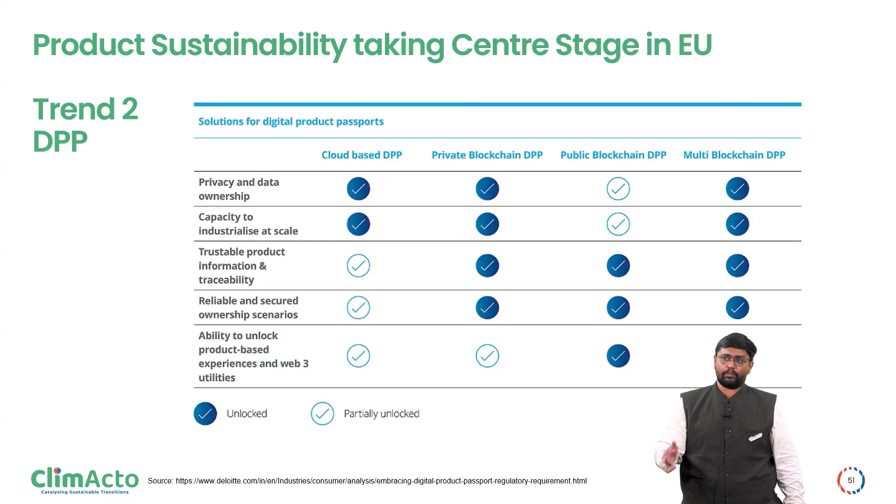And the core basics of this is an LCA. Only if you do an LCA, you can report it in a format which is like a DPP. So if you make it into a PDF and publish as per a standard and put it in a publisher's place, it is an EPD. If you are going to make it into a DPP mode, it's more a digital passport. And when I say digital passport, there is a blockchain angle to it. So this is again another study done by Deloitte. They are saying what are all the opportunities in DPP and what are the technologies that are there in DPP. So there's going to be blockchain, private blockchain, public blockchain DPPs in Europe.

So broadly, in 1 hour, what is embodied carbon? So jargons I try to simplify. Stages, then A1 to A5 stage. So we have discussed we need foreground and background data that help us in making more accurate calculations. Coming nationally, internationally, getting its place in ESG ratings, because if you look at it, there's a business angle to it. Investors ask, what is your ESG performance, and life cycle ESG performance. So if you're not looking at the data or you're not having a life cycle thinking, it's going to affect your revenue, your investment, your brand. So these are all the business angles.